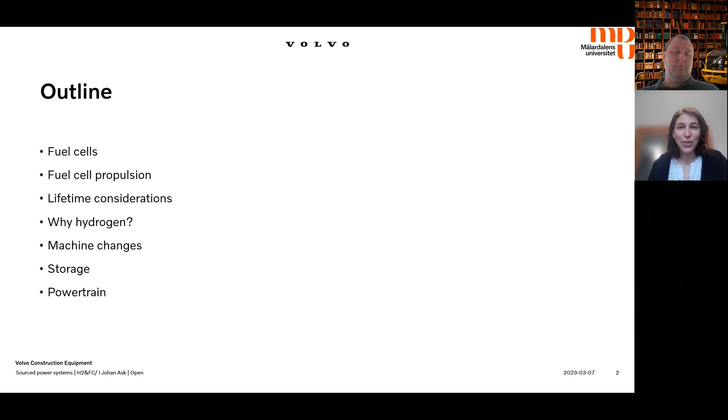Then we're going to have a first little break for questions about my part, and then Johan will come and talk more about really practical aspects of how the machines are going to change if we are using fuel cells to drive the electrical motor. So what are all the practical issues that we have to consider in the powertrain and so on.

So let me start with actually giving a bit of context and putting hydrogen into the context of electromobility. I mean, the goal of electromobility is to really decarbonize the transport sector, which is right now one of the most challenging sectors to be fossil free. And of course, in this view, we see that most of the work will be done by battery-driven vehicles. But there are some niches in the transport sector where we can see that actually hydrogen can have much more promising applications than batteries. And that's mainly due to the limitations of batteries.

So we know that it comes down to the question of how the energy is stored. Actually, batteries and fuel cells use essentially the same principle for working. We want to transform chemical energy into electrical energy. So we have a cell that has a positive side and a negative side.

We have a reaction inside and electrons that are transferred through an external circuit, and that can give us electricity that we can use to drive a motor or other equipment. So this is essentially the same, whether the chemical compound that we're using is lithium-ion or hydrogen. But the big difference is where the energy is stored.

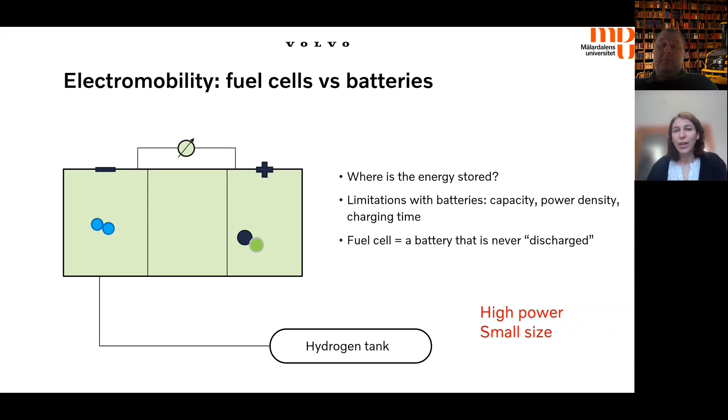So in all those applications where high power density, long driving range or long autonomy, or really short charging time are of utmost importance, we see that hydrogen can bring a clear advantage over batteries. So this is to put it a bit into context. Now let's look a bit closer at how a fuel cell works. As I said, it's not very different from a battery, so the same concept applies here.

If we really zoom in and look at the fuel cell very closely, we see that essentially, as in a battery, it has a positive side and a negative side, where this chemical reaction occurs. There are current collectors on both sides to collect the electrical current, and there is a membrane in between the two electrodes. In the type of fuel cells that are mostly used for mobility, a polymeric material constitutes the membrane. So this type of fuel cell is called PEM, or polymer electrolyte membrane, of course because of the material that constitutes the membrane. And this type of fuel cell usually operates between 40 and 80 degrees Celsius and at low pressure, atmospheric pressure up to 3-4 bar, in the most common applications.

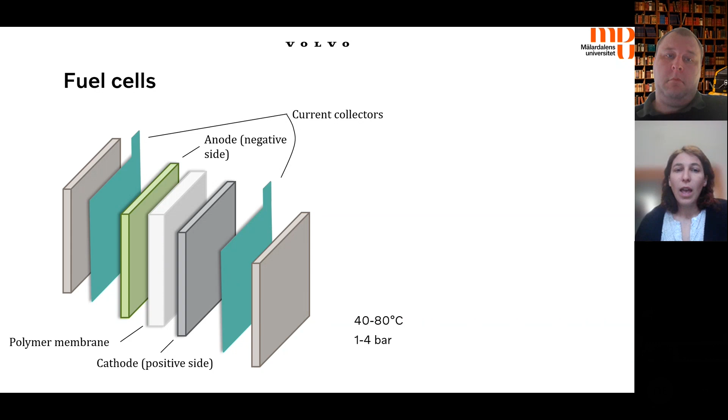The way the fuel cell works is that on the negative side, we usually have hydrogen flowing through. That's the chemical element that is oxidized. And on the positive electrode, we use the oxygen from air. So we can simply use air to flow through the fuel cell, and the oxygen is used in the reaction. Because only hydrogen and oxygen react, the only product is water. So it's a very clean technology. It doesn't produce any CO2 or anything else. So of course, we can consider it completely fossil-free if the hydrogen is also produced in a fossil-free way, so green hydrogen from electrolysis, for example.

One single cell is really small, and it actually generates less than 1 volt. But we can stack thousands of cells together, either in series or in parallel, depending on the amount of power that we want to reach. And the important characteristic here is that the performance is not so dependent on the size of the overall stack, because the performance of one cell is very modular. So if we have one cell, we can stack together a lot of cells. So the performance doesn't really change if we have one cell or a million cells.

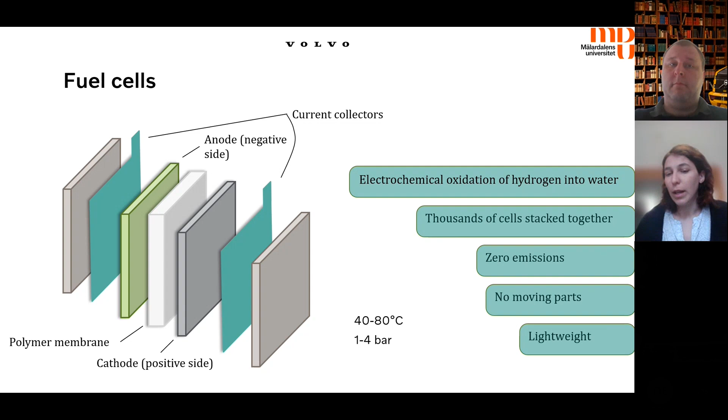Now, I want to explain a bit more in detail how the fuel cell works and what is the performance that we can expect. So we have an ideal voltage in between the two electrodes that is simply given by the ideal amount of energy that we can release from the reaction between hydrogen and oxygen. So this is the ideal voltage in standard condition in terms of temperature and pressure.

This is, of course, not the real voltage that we can expect to have between the two electrodes. First of all, because we have an effect due to the temperature and the pressure, which lowered the voltage from the ideal case. So we refer to it as a Nernst potential or Nernst voltage. But the open circuit voltage is even lower, and that's because there is energy that is spent just to activate the reaction of hydrogen and oxygen.

And then from the open circuit voltage, what you see here on the screen is the characteristic curve of all types of fuel cells, of the voltage versus the current. So as we increase the current that we draw from the electrodes, we see a decrease in voltage with this particular shape. The difference from the open circuit voltage and the actual voltage can be related to different types of losses. Some that are related to the reactions itself, so kinetic losses. We have ohmic losses because of the electrical charges that have to go through the membrane, and mass transfer losses.

Now, because the power is the product of current and voltage, we can see that the power has a trend like this, where it increases with increasing current up to a certain maximum point, and then for even higher current, the power will drop because the voltage now is dropping too low. And so there is always a certain point where we have the maximum power from the fuel cell, which is at quite high current. But the maximum efficiency is at low current, where we have higher voltage. So this is a bit particular of fuel cells.

Most of the other systems that we use to convert energy, they usually operate in a way that the maximum power is also the maximum efficiency point. In a fuel cell, we have a bit of a trade-off in this sense. So if we work at maximum power, we usually operate at much lower efficiency. So that means that the operating point could be somewhere maybe in the middle, where we can have a trade-off between high power and high efficiency. But this also makes it interesting because unlike most of the other systems and engines, when we decrease the power, we usually have higher efficiency, which doesn't happen in traditional engines, for example.

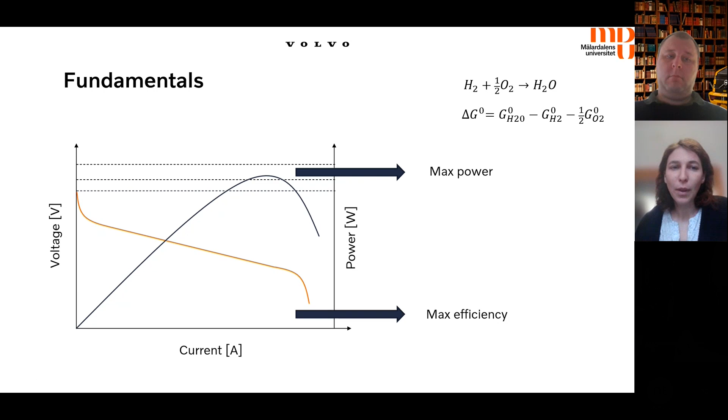But then let's look at the fuel cell in the context of propulsion. What are the other elements that are needed around the stack? So we know now how the fuel cell works. We feed hydrogen, we draw some current, and then now we have electricity to drive the motor. But what are the other components that are needed around it to make it work? First, a very important component that I'm going to mention is fuel and air conditioning systems, and in particular, the need for humidification.

That's because in PEM fuel cells, as I mentioned, the membrane is a polymeric material. The most common used is Nafion. That's the commercial name of the material. So one important requirement for it is that it should always be humidified within a certain range of humidity. So we always need water in the liquid form with a certain thickness that surrounds the whole membrane. Otherwise, the membrane just doesn't work properly. The conduction property of the membrane drops, and so the membrane cannot really transfer electrical charges from one side to the other of the cell.

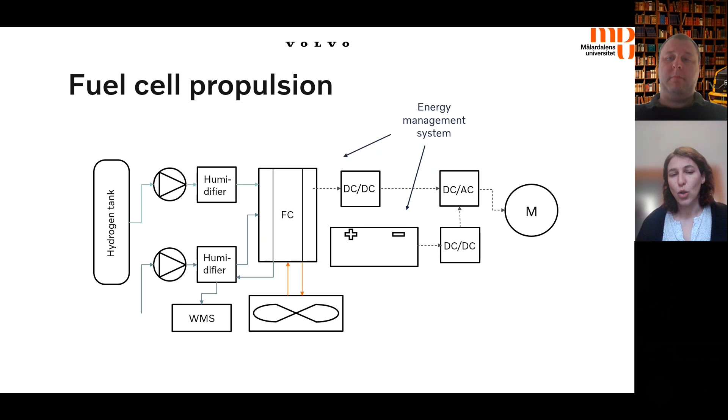Of course, when we talk about aerospace applications, we are looking into liquid hydrogen. And for maritime applications also, I want to mention just one other option for hydrogen storage, which is being tested right now on some ships. That is metal hydride. In metal hydride, essentially the hydrogen is absorbed into the structure of a metal. And the advantage of this system is that it consumes less energy to store the hydrogen, which is one of the big disadvantages of, in general, storing hydrogen.

Either we have to compress or cool it down to liquefy it. That's a lot of energy that is needed. So the cost then becomes quite high. So the solution of metal hydride can be a bit cheaper. Of course, the weight is quite considerable, because we are talking about 100 kilos of metal hydride to store 1.5 kilos of hydrogen.

But then the characteristic of the metal hydride is that it needs some heat to release the hydrogen. And the heat that is needed is around 45 to 65 degrees, which is actually the operating temperature of the fuel cell. So then we have a perfect coupling here, because the cooling circuit of the fuel cell can also be used to provide heat to the hydrogen storage to release the hydrogen. And of course, when we need more hydrogen, it's because the fuel cell is operating at higher power, so it's producing more heat. So this is a perfect coupling.

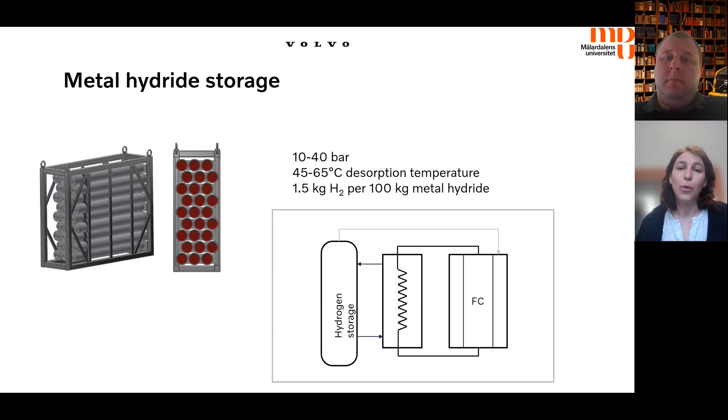And then we have this heat exchanger in between. So I just thought to mention this, not very relevant for land transportation, but it is being looked at in more detail for maritime naval transportation.

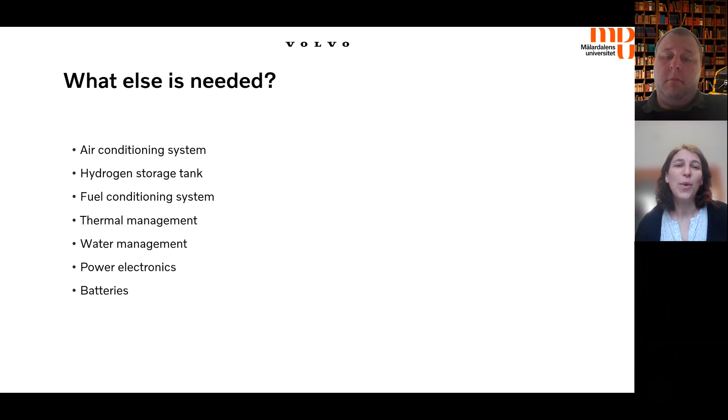So just to summarize what I showed before, what is needed to make a fuel cell work, to use hydrogen in a car or a truck. We need the conditioning system for the air and the fuel, hydrogen storage tank, thermal management system, water management, really important, power electronics, batteries, with also some control of how much power is split between the two.

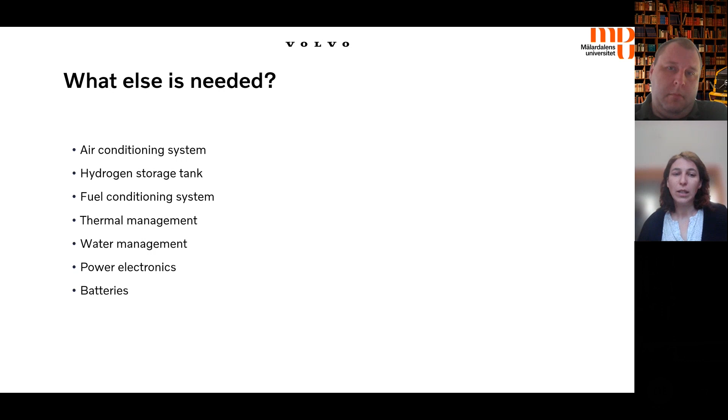And the answer that I have is actually that we don't know. We still don't know so well, because for batteries there has been extensive research and work, but fuel cells are still maybe a less mature technology, especially when it comes to commercial applications. So there is a bit less thorough testing in real road conditions of different vehicles. Mostly there have been accelerated tests in the lab. So we expect that we can meet these targets, but there is still not enough data and results out there to have a really complete picture.

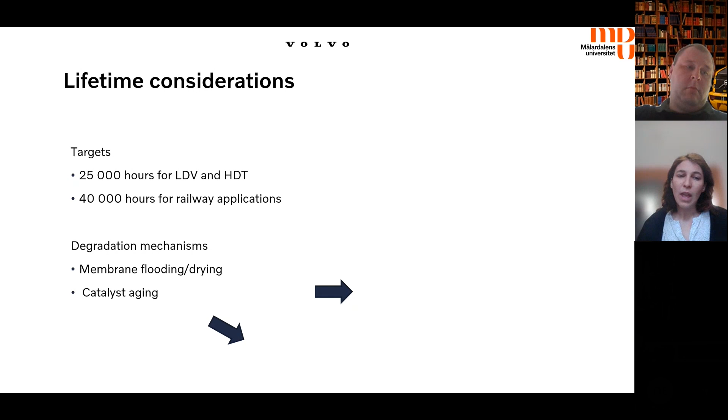When it comes to reasons why the fuel cell lifetime can be limited, I want to cite here just two main reasons. One is what I already mentioned, the need for the membrane to always be humidified with a perfect amount of water. If that doesn't happen, we can go to both extremes. We can have membrane flooding when there is too much water, or membrane drying. And both conditions cause, of course, the membrane to stop working properly, so the performance of the fuel cell is way below what we expect. To prevent this problem, as I mentioned, it's very important to have a really good conditioning system and good water management.

But then there is another aspect that is quite inevitable, unfortunately, that is the aging of the catalyst. PEM fuel cells usually use platinum as a catalyst, and over time it can react with other materials, or different things happen so that we lose part of the catalyst and the fuel cell doesn't work properly. So this is, on one side, a matter of having better materials, so more material science study to improve the fuel cell materials. But what we can do in operation is to have a good energy management system, because as I mentioned, we can really extend the lifetime if we can avoid very sharp acceleration and deceleration. So if we have a battery system and a good control system to use the battery when it's needed to aid the fuel cell, then we can really extend the lifetime.

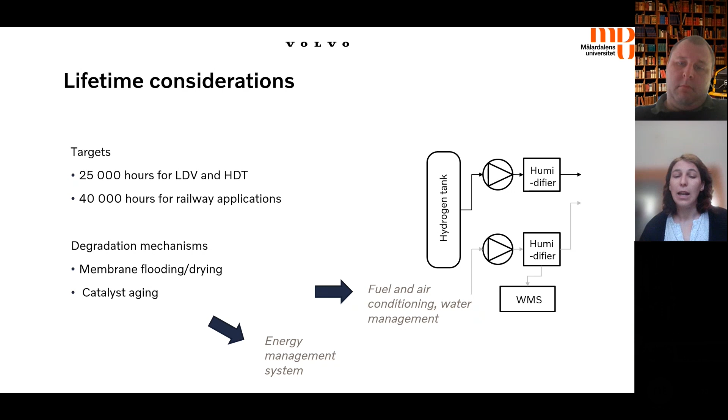So to conclude my part, I want to circle back to what I was saying at the beginning, the context of hydrogen in electromobility. You all know that hydrogen is a very promising energy carrier. It can be produced from many sources, so green hydrogen could be the answer to a lot of problems. It's very flexible. When it comes to energy storage for the long term and transportation, it can be more flexible than transporting electricity. And if we have combustion of hydrogen, but even more if we have the electrochemical reaction in the fuel cell, the only product is water. So it can really be the answer for zero emission transportation.

When it comes to the use of hydrogen in PEM fuel cells, I have to mention that PEM cells require really pure hydrogen because they're definitely not tolerant to any small impurity. So this could add cost for the hydrogen treatment before it can be used to fuel up the car, because the requirements for purity are really, really stringent.

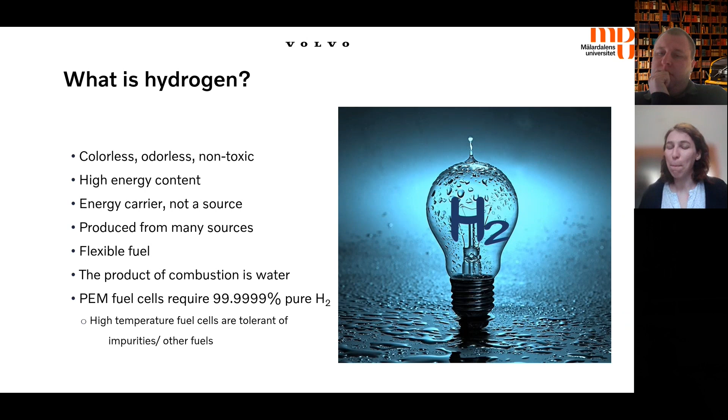Good. Should we hand over to Johan here? So I will start off with sharing our perspective on hydrogen, and I will start by speaking of this machine that has been shown, called Elkalle or Electric Charlie. That is a joint research project between a couple of Swedish partners, with the aim of building a technology demonstrator. This is not a machine that we aim to sell at this stage. It's just to show that the technology for doing this exists, and we will continue to test it and so forth.

So we are going from laboratory research to actually doing real machines and vehicles. We have also released a truck that is officially known, so we are testing that as well. To summarize, from the theory Valentina explained to the real machine, this machine ended up being far lighter than we expected, because the weight of the fuel cell is so much less than a battery or even a combustion engine. And for this kind of machines, the lighter the vehicle is, the more you can carry. So you earn more money in the end, instead of just hauling around batteries.

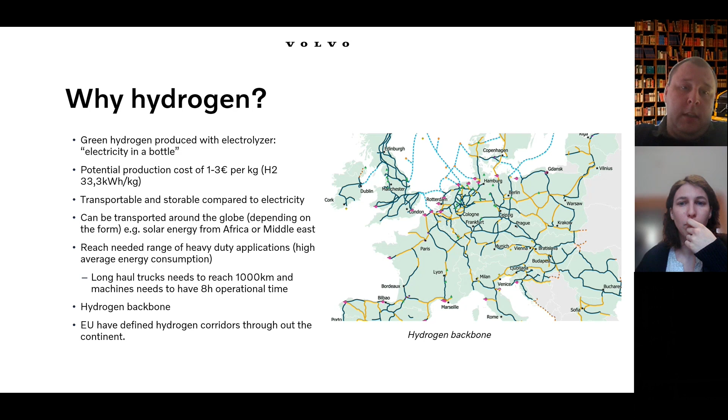So what is the benefit of doing this? Well, basically you end up with an electric machine that we need to have regardless of whether it's a fuel cell or a battery. We need to have the same powertrain behind it. So I'm not comparing here the possibility of recouping brake energy for the energy reduction and so on. I'm just comparing apple to apple here. So we have the possibility to then have a range of 8 to 10 hours of machine usage, or 1,000 kilometers on trucks. We can have continuous high energy output,

meaning that, as Valentina said, there is a split between energy and power. And that you don't have in a battery, because if you have this amount of energy, you get this amount of power. But here the size of the fuel cell says how much power you can get, and the size of the tank says how much energy you can harvest of it. And we will end up with a refueling time of approximately 10 minutes in compressed gas. I should just clarify that is not today, because ISO is working on a standard refueling protocol that has not existed before, so it has been best engineering practice, and then there have been some challenges there. But we will end up with 10 minutes here in a few years.

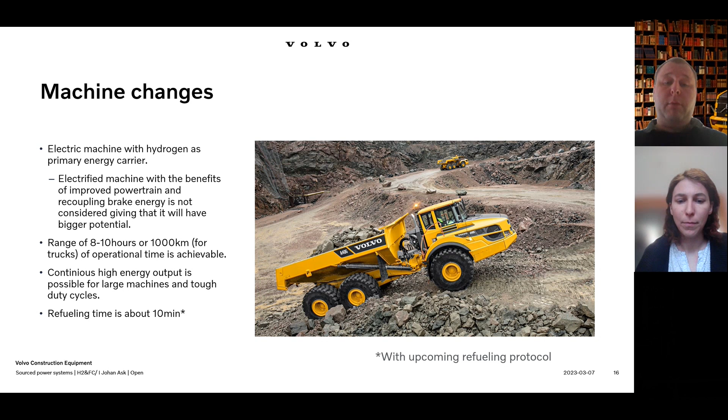So that is what's upcoming on the machine level. Then if we deep dive a little into maybe the most important technologies or technical areas, maybe I should say. Cooling. As Valentina said, due to the electrochemical reaction, basically almost 50% of the losses or the total energy consumption is in heat, because we don't have any exhaust mass flow as an engine does. So we have more energy to the cooling system, and we need to cool it at a lower temperature. A PEM likes to work at around 80 degrees compared to an engine that is closer to 100 degrees. And that means that higher heat rejection gives a bigger cooling package, and lower coolant temperature gives a higher heat rejection. So we get an even bigger cooling system,

meaning that we will have a huge cooling system and very big cooling capacities. But if we do this in a smart way, with some sort of look ahead or road ahead or whatever it's called these days, to see what are the loads that come in front of us, we can start to charge up the battery a little, or we can cool down the fuel cell a little, so that when you go uphill you can let it warm up, because you know that there will be a downhill where you can cool it off and stuff like that.

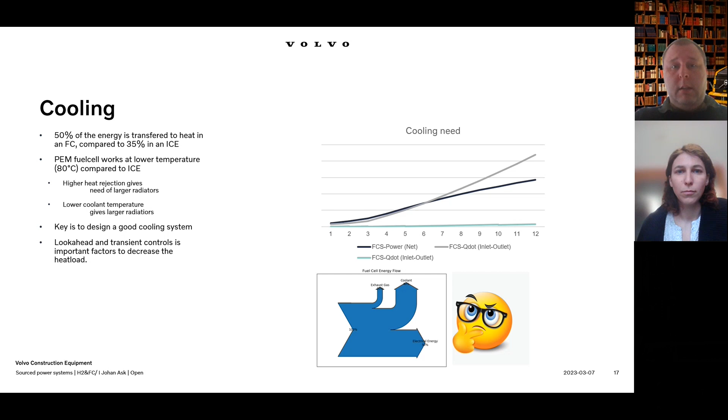And then not only does the hydrogen need to be very clean, the air needs to be very clean in the system as well, since the fuel cell is sensitive to gases, which in most cases causes corrosion on the catalyst. This is today solved by using active carbon filters. But the problem with the carbon filter is you can never detect, without having a laboratory, when the filter is saturated with gases.

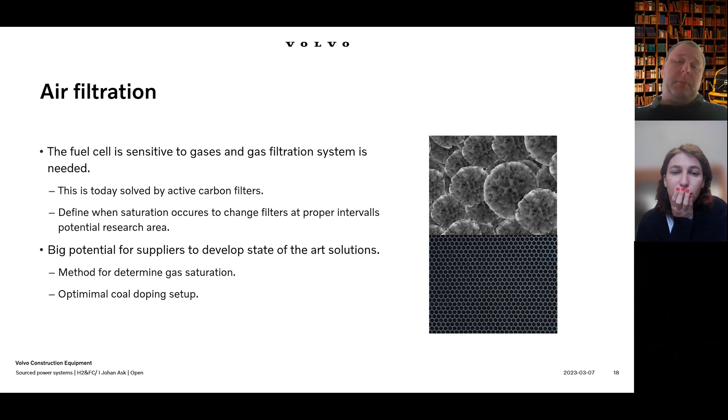So it's not like a conventional particle filter that you have today, where you can see that it's filled with debris. So here I believe that the suppliers have a huge potential in creating state-of-the-art solutions for determining when gas saturation occurs in the filter, and also coming up with the optimum carbon doping setup, meaning that you can do active carbon in different layers with different characteristics to absorb different kinds of gases, depending on if you're in a mine or on a road or in a quarry or whatever. And that I don't think will be led by the vehicle manufacturers.

Then the storage system. Today the state of the art is 700 bar compressed gas. That is what is used on the existing vehicles on the road, with the exception of some buses that are 350, but it's the same kind of technology. The technology is there. You can buy it off the shelf at suppliers. But the challenge here is that it's produced from carbon and epoxy, which is not recyclable for the time being, meaning that they need to be scrapped and thrown away, more or less.

So for this to get big scale, I think you need to think about how you can recycle it in an environmentally friendly way, and how you can manufacture the tanks at a good cost. Because right now you need to spin a lot of carbon fibers around a cylinder. That's very labor intense. Even though it's done by robots, it's still very, very time consuming, which drives the costs up even more.

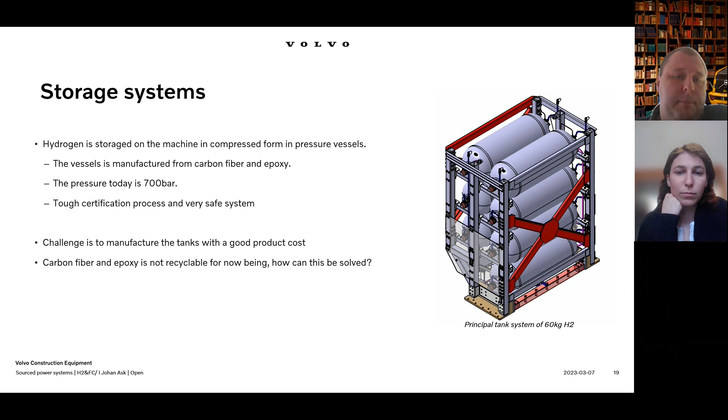And hydrogen does not exist only in gaseous form. You can cool it down and then you get it into a liquid form with a higher energy density. But on the other hand, it's very, very, very cold. You need to go down to 20 Kelvin, which is minus 253 degrees. But then you have almost doubled the amount of hydrogen you can carry with you, since you get up to 71 kilos per cubic meter compared to 42. I don't think I have stated this here, but compressed at 700 bar, it's about 42 kilos per cubic meter.

And even though it sounds very extreme to have a liquid that cold, the tank you have is a stainless steel thermos, more or less, very similar to what is used in natural gas tanks today. And those are commercially available at vehicle level and for ships and so forth. And a lot of hydrogen today is already liquefied, but not used in the vehicle industry, rather in the chemistry industry and the medical industry.

And for our situation, where our machines don't go to the fuel station, rather the fuel station has to come to the machine, if you have an excavator or a wheel loader or something like that, then it's a real challenge to bring the hydrogen to the user, both to the site and then to the machine. And then it's even easier if you have it in liquid form compared to gaseous form.

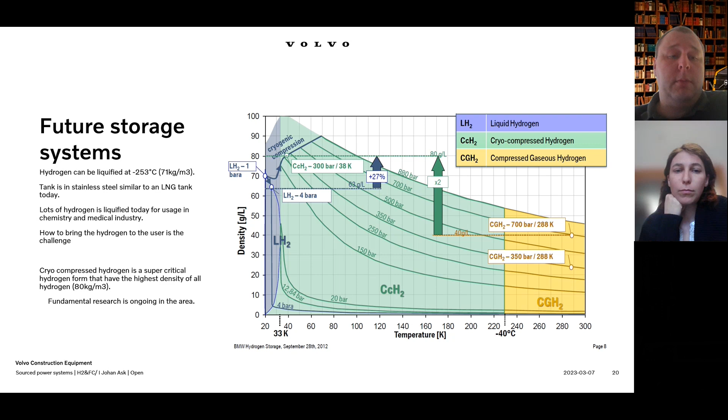And refueling in gaseous form. As I said, there is a high-speed refueling protocol being developed. These kinds of commercial refueling stations exist all around the globe, even though there are not too many of them, as with conventional fuels. But we have 5 or 6 in Sweden at the moment, I believe, and there are at least 100 of

them in Germany. And connected to these hydrogen corridors, it's stated that within the European Union, there should be 1 in every 100 kilometers on the big roads throughout Europe. And the standard dispenser is designed and is the one to use, so to say. So there is no question about that. It's really just go ahead, more or less.

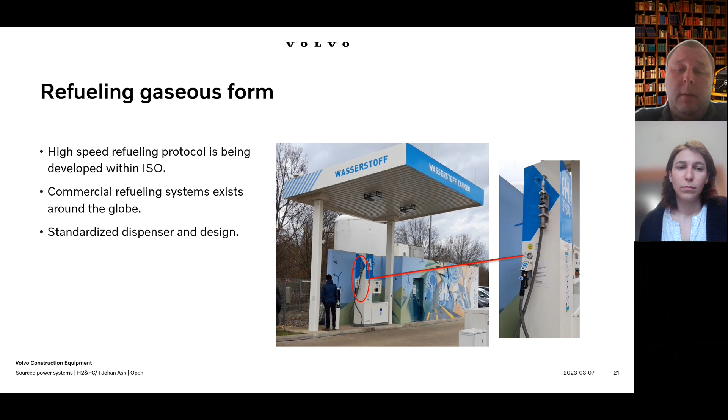And then my last slide and my conclusions. As we said, the power split between fuel cell and batteries is very, very complex. And for the time being, the right solution can only be determined at vehicle level. You need to know what kind of vehicle you will build and how it will be used.

Oh, sorry, everyone. My vacuum cleaner just decided to turn on.

So you need to know your customer and the work really, really well to be able to do the perfect powertrain split. And then you also need to consider, what do you want to sacrifice? Do you want to sacrifice cost, performance, or lifetime? And what component do you want to sacrifice first? The battery, the fuel cell stack, or any other component? You need to determine the weakest point in the chain.

It is not possible to have a perfect chain, because then you will end up with too high a cost, and then it's not the perfect chain anymore. So that is something that we can discuss for hours and hours, and I said you can do a PhD on that if you want. But it's a big challenge for sure.